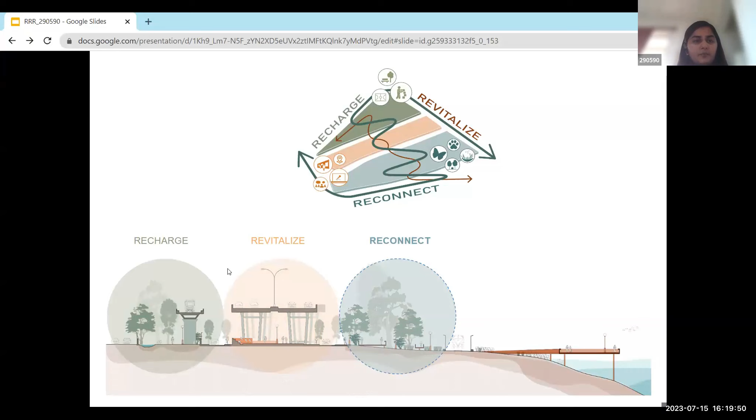Coming back to the spatial planning of the site, our design aims to connect and integrate the different parts of the site into a large urban park using an integrated network of trails, paths, and boardwalks that connect to different types of activity nodes within the park.

We use water as a running theme that is celebrated throughout the park, using water features such as retention ponds and grass swales filled with water running along the trails in the recharge zone. The acrylic art installation on the flooring symbolizes and reflects the water in the revitalized zone under the flyover, along with a shallow water body that continues the narrative of water under the flyover.

In the Reconnect zone, we have visualized the space as a wetland with a number of biofiltration ponds and bioswales that connect to each other, acting as a miniature of the traditional lake systems of Bangalore.

Moving forward, these sites serve as a stormwater management system for surrounding areas by incorporating blue-green infrastructure such as rain gardens running parallel to the roads, and bioswales which open into the retention pond, from where surface runoff is then carried to biofiltration ponds, to bioswales, and finally draining into the lake.

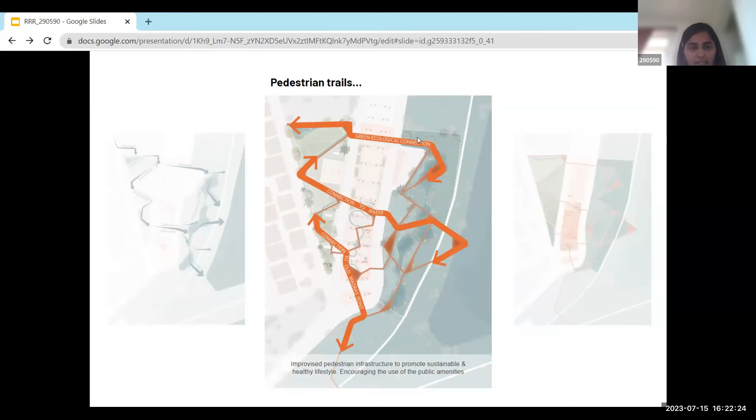To provide the connection to the old Madras Road, we have established a pedestrian walkway incorporating the existing Kasturi Nagar underpass and the existing walking trail along the southern part of the Benniganahalli Lake. In order to ensure safe accessibility throughout the site, improving the existing streetscape by providing better street infrastructure like street light, walkway, ramp, etc. is also an important aspect of our design and plan.

So we have divided the site into multiple activity zones based on the requirements that came forward as part of our community engagement and mapping exercises, keeping in mind the location and the footfall that the activities will generate. The Kasturi Nagar Park, towards the west of the site, is planned as a community-centric park where majority of programs cater to the residents of Kasturi Nagar, as the park is near to the neighborhood.

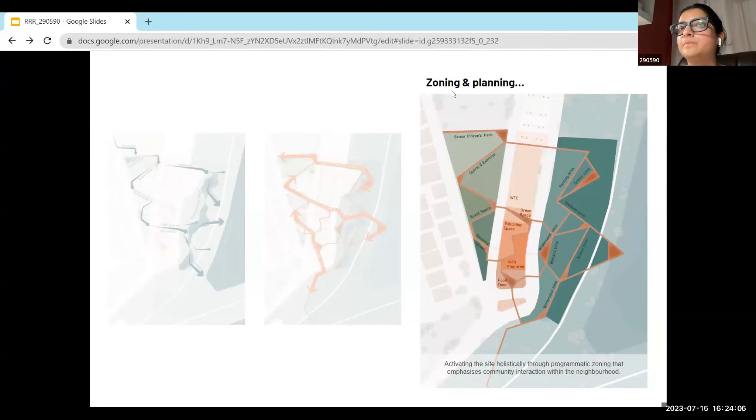You're not audible. Your voice is breaking. Hello, Aditi. Just a minute. Sure. The area of the flyover is planned as a dynamic space that transitions seamlessly from... Sorry, but your voice was not coming through. It's breaking. Yeah, just a minute, we are resolving the issue. Sorry. Hello, is my audio better now? Yes, it's better now. All right, I'll just continue. We lost whatever you were saying for 30 seconds. Sorry, we didn't hear. All right, I'll just... you can go through again.

So we have divided the site into multiple activity zones based on the requirements that came forward as part of the community engagement and mapping exercises, keeping in mind the location and footfall that the activities will generate. The Kasturi Nagar Park, towards the west of the site, is planned as a community-centric park where the majority of programs cater to the residents of Kasturi Nagar, as the park is near the neighborhood.

The area under the flyover is planned as a dynamic space that transitions seamlessly from day to night with changing activities. The part next to the lake is planned as a minimal intervention and ecologically sensitive park where people can engage with the local plants and different species of birds and animals that nest in and around the lake.

The recharge zone is primarily developed as a community-centric zone where large open spaces are provided to allow flexibility of use based on the community needs for different types of community gatherings and programs. Within this area, we have also incorporated jogging tracks, open-air gyms, and playgrounds for children to promote physical fitness and health in citizens of all ages.

Relaxation gardens provide space for leisure and can also be used by senior citizens to reconnect with nature while relaxing. Within this zone, we have also allocated a zone for community farming, which can contribute to strengthening community bonds and can also help in effective waste management by promoting organic composting techniques. This would also encourage the use of organic and homegrown produce that will enhance the health and quality of life of the citizens.

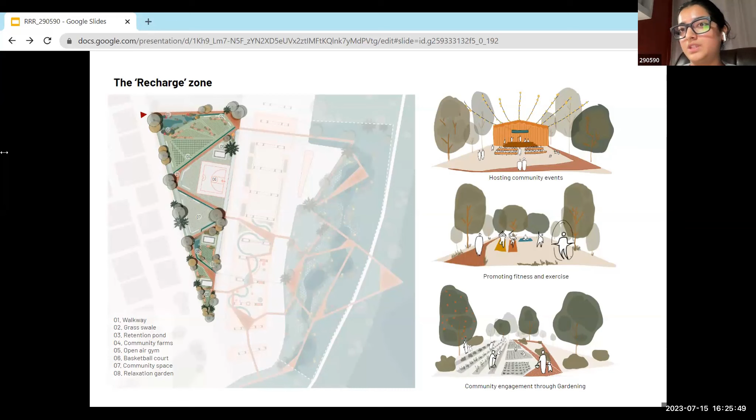We are envisioning the recharge zone as an oasis for the Kasturi Nagar residents, a place where community grows and interacts. One of the most important features of this space is the waste management aspect, promoting the circularity of food production, waste generation, and waste management in terms of infrastructure and construction materials. We want to keep the space as natural and low maintenance as possible by promoting the use of local materials and practicing reuse and recycling wherever possible.

This area also facilitates sports activities like skateboarding and wall climbing that are not commonly present in the Indian context.

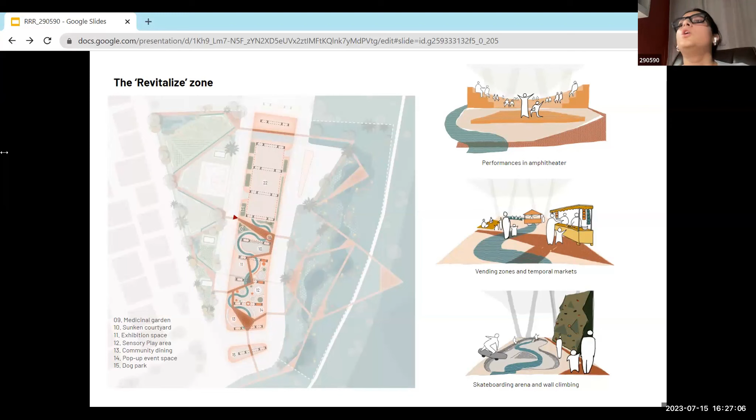One of the key features that came out of this community mapping exercise was poor to no light infrastructure under the flyover area and the streets, making the space feel unsafe and inaccessible at night.

The most prominent feature of the proposed space is the dynamic quality of the urban landscape that transitions seamlessly from day to night, where the light installations light up after dark, making the site safe, accessible, and active throughout the night. We imagine the area under the flyover to be well lit, not just with activities such as vending and temporal markets, but also a series of light-based art installations that could add to the character of the space and give it a unique identity.

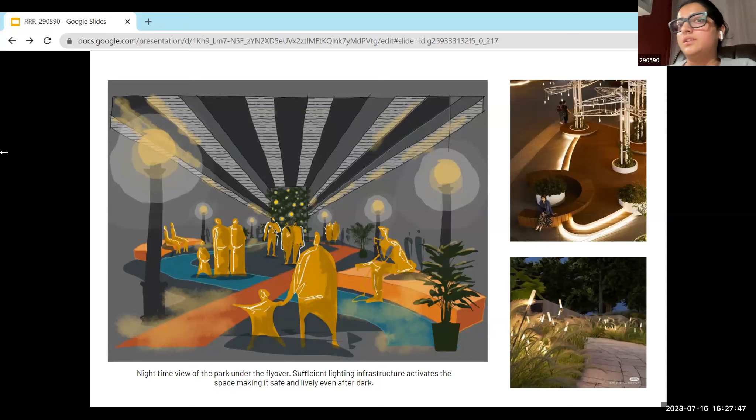The site is designed to enhance biodiversity by providing a habitat for local birds and animals, incorporating native plants, trees, and shrubs to create ecological corridors and support local wildlife.

The most important part of the design is the connection to the lake, where residents are able to access the lake as in older times.

Ecologically sensitive and natural design features on this part of the site help with stormwater management while also encouraging people to engage with the local flora and fauna.

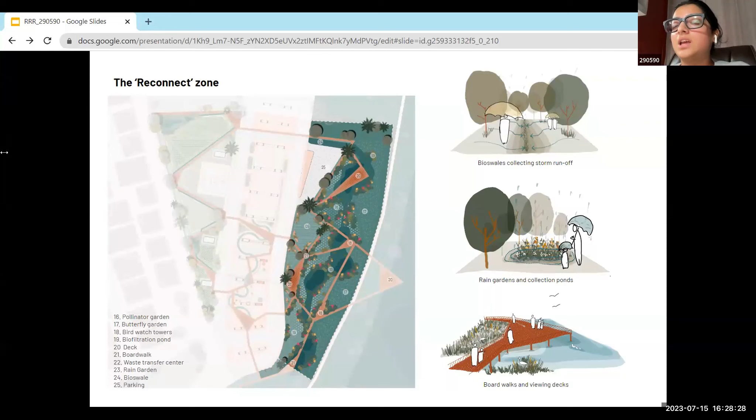The use of rain gardens, bioswales, and retention ponds as prominent design features of the site also double as educational opportunities for visitors. We imagine the Reconnect zone as a series of boardwalks meandering through the different landscapes within the site, providing visitors the opportunity to connect, engage, and educate themselves about the lake ecosystem and how important it is to the city of Bangalore.

Viewing decks and watchtowers can be incorporated in this part of the site, where people have the opportunity to pause, reflect, and interact with nature.

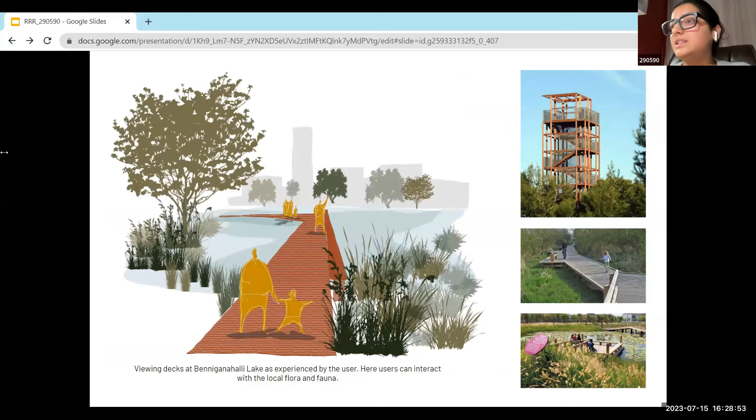To conclude, through this design intervention, we want to enhance the existing natural and built environment while addressing the ecological and social challenges that the site brings forward. Through our design and planning strategies, we hope to promote sustainability and increased community engagement that not only helps to liven up this area, but also helps in the long-term maintenance of the quality of the space.

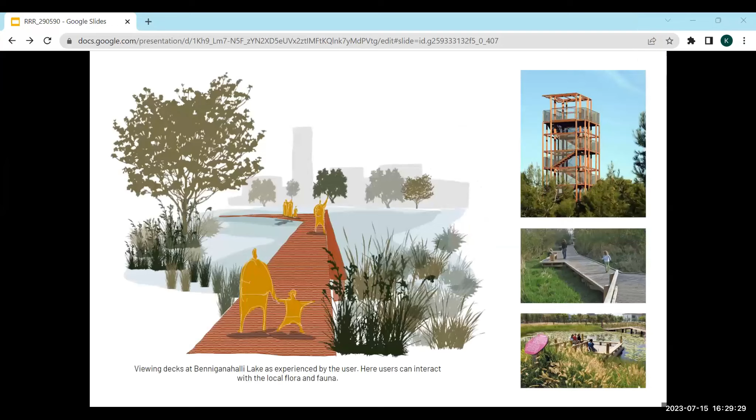Aniruddha asks: there is a windway tunneling effect because this site is on the east-west open conduit from the lake towards the road leading to Banaswadi. What will be the impact on the waterline trails?

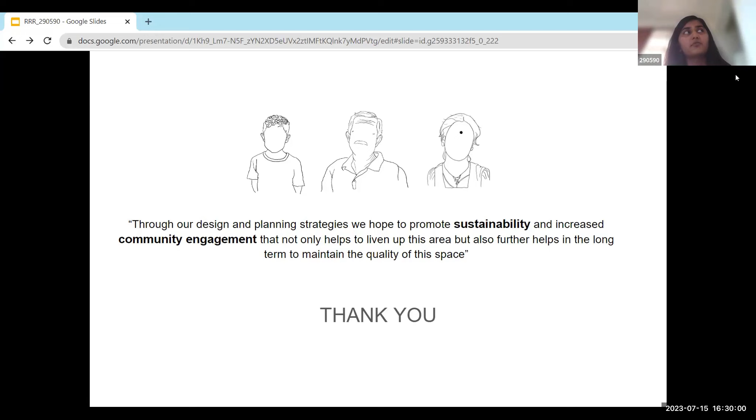You're talking about... sorry, Kelly, you continue. So, I'm trying to understand the question—how the wind is affecting the water. That's what they are trying to say.

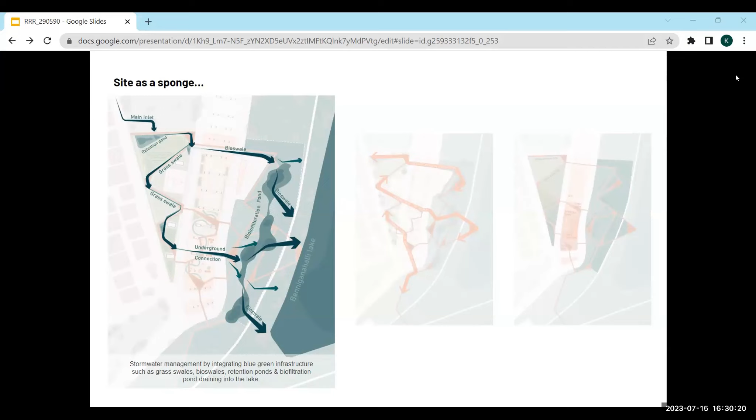Wait a minute, I wanted to know your thoughts. Have you thought about it—there is a major wind conduit happening here because it's east-west, and how it will overall impact your trail farming and all these activities? Have you considered the wind as a factor when designing this?

So actually, when we were thinking of water management, we were thinking just of the surface runoff, not particularly the wind, which will change the movement, because most of the bioswales and grass swales are thin strips, and the main inlet is from the Raj kaluves and the drainages running parallel to the road. So more or less, the wind is not going to affect the surface runoff—that was what we thought. But yes, we can also enhance and use this as an opportunity for further development.

Just to add to Kelly's point, I think it is a great question, and we had not actually taken it into consideration. Moving forward, I think it can be an important aspect to keep in mind while designing.

So do that when you will be doing another design, or even in this project.

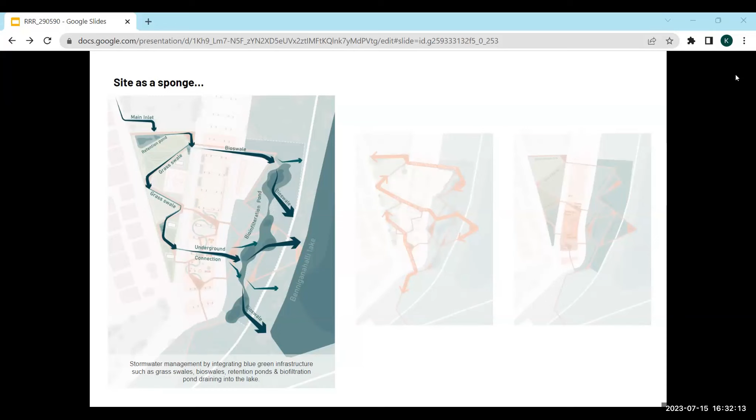Wind has a tremendous effect here also because of the setup of this place. On one side there is a residential zone, and wind, especially when there is open land used for farming, will create a lot of dust when there is no crop there or during dry periods. So when there is an open ground, there's a higher likelihood of dust flying across the overall area.

Also, since it's on the fringe of a lake, there's already a green cover with a lot of big trees. So wind also carries a lot of leaf litter and spreads it across the area. If there are water line trails, the leaves will settle into it, so there will be higher maintenance activity required for the water line.

Yeah, that's it. Yeah, yes.

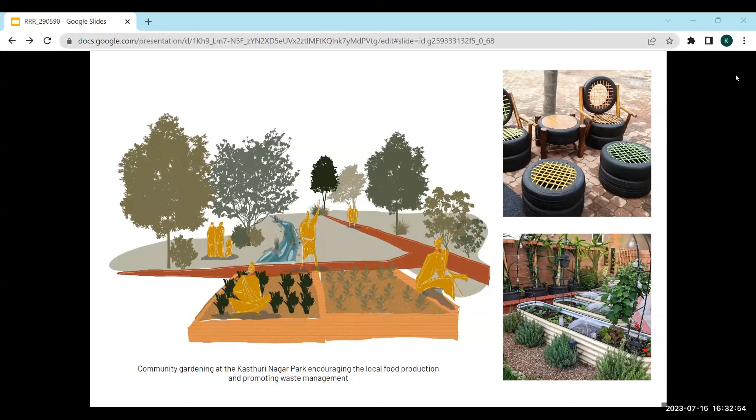Thank you. I request other jurors to share their questions and comments, please.

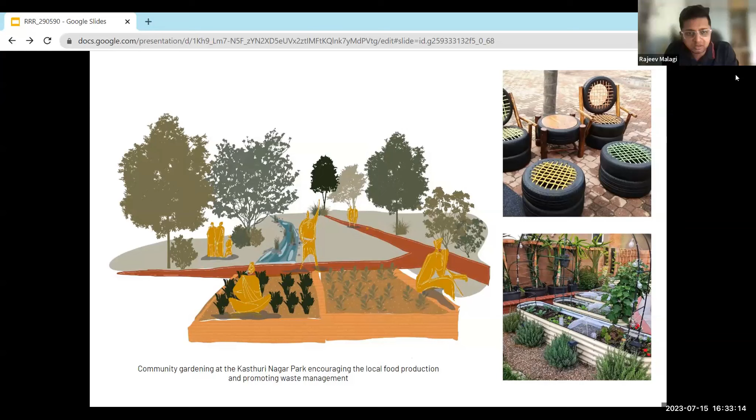Can I just mention it? It's rather easier to ask than type. Please do. Could you please go back to your initial diagram on the water movement, the first map?

Yes, sure. Is this indicating the slope of the ground and the way water moves, or what is this indicating? That's what I wanted to understand.

The blue arrow, yeah. So this is what we are trying to play with regarding the water. As the Raj kaluve is going straight, we are trying to bring in the water from the Raj kaluve. Can you see my cursor? No, but I do understand. Sorry, so we are taking it in three zones.

First, primary will be in the recharge zone. Then it is taken to a more natural zone where it is retained, because most of the time the surface runoff accumulates, and since the underpass is towards the south, the water gets clogged over there. So we're trying to delay the water by using this vacant land and putting in a biofiltration pond. That's the main idea, to avoid the clogging.

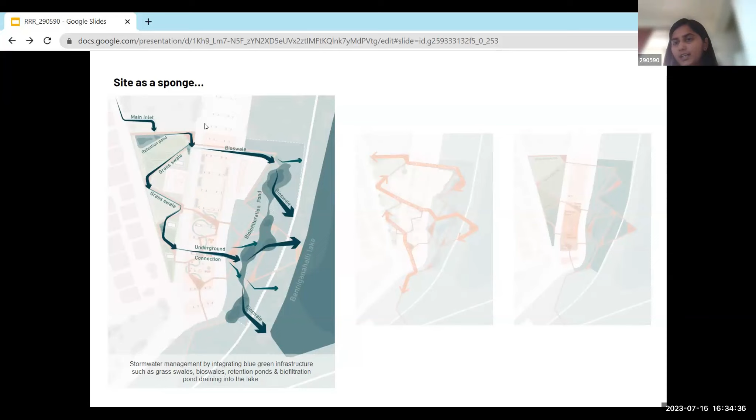Just hear me out. If you see the arrow mark towards the left, where you've written grass swale, on the left side - essentially if I'm assuming my slope to be from west to east, because you have the lake on the other side, my movement would be downwards, going from west to east. But if you see the arrow mark indicating the grass swale, it's actually going against the slope direction. Are you getting my point?

Just let me finish my question. First, I want to understand why you created this kind of pattern - I was presuming it's based on the movement of the sloping lines of the contours, but that also equally reflects on your pedestrian movement, which you're talking about, right? So the two questions I had: one, on what logic did you determine this whole water movement pattern? Because some arrows are going against the water direction.

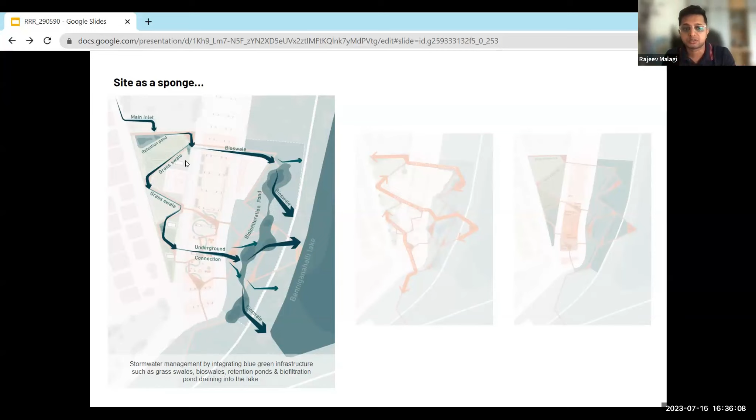Second, if you've determined that in the pedestrian layer next, nowhere in the whole presentation did you actually address the movement of vehicles which are also cutting across this. For me, this is shown as a project confined to one area, without any external influences like traffic movement and so on. So please address these two: pedestrian versus vehicle movement, and secondly these arrow marks of water movement.

To answer the first question regarding the movement of water: towards the right side, where we have our ecological park with the wetlands, we know that the water is actually sloping from west to east. Within our triangular part, the Kasturi Nagar part, we saw no visible level differences that could dictate where the water actually slopes towards.

So we were thinking that along our pedestrian trails, we could give provision for a slope down towards the pedestrian trails, where the water can be channeled. And then we have these pedestrian trails cutting across the site to the wetlands, which connects to the lake.

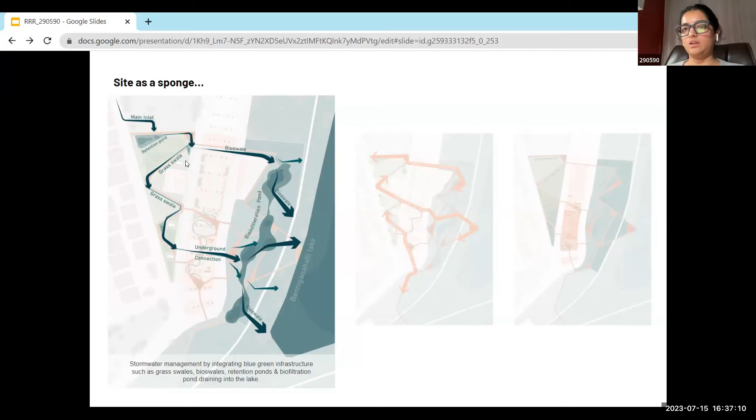So this will provide an artificial channel, not a natural slope, but something that we have created just to channel the water across the site into the lake. So that was the reason for keeping it along the pedestrian trail.

Second, about the vehicular movement that has not been addressed. So based on our understanding of the project, which might or might not be the case for what was required, we kept it to a relatively conceptual level.

Obviously, coming to the next stage was the traffic flow, the materials of the roads that will be used there in order to slow down the traffic, and how the pedestrian crossing will happen. So the question of material, infrastructure, and the kind of structures that will come into place, we thought was the next step into the process of design.

So here we've kept it relatively conceptual. I mean, even at a concept level, I think the traffic has to be resolved even before going to material. And that was the point I was trying to make, but thank you.

Yeah, and even the trail is right now cutting the railway line. So, I mean, you have to... Yes. So for that, when you have to channelize below the railway lines, it will hamper the traffic of the railway when you are doing that.

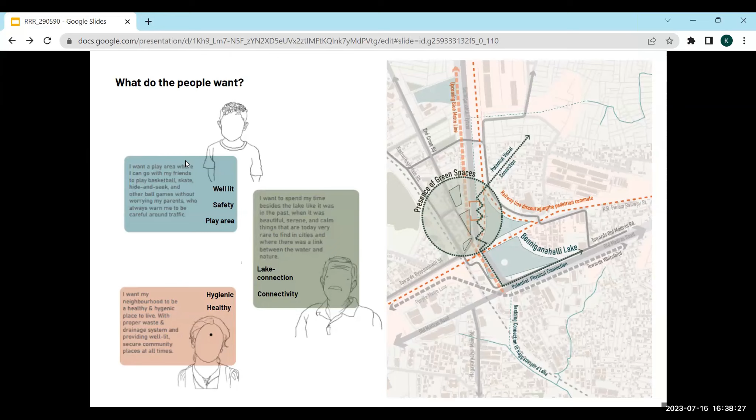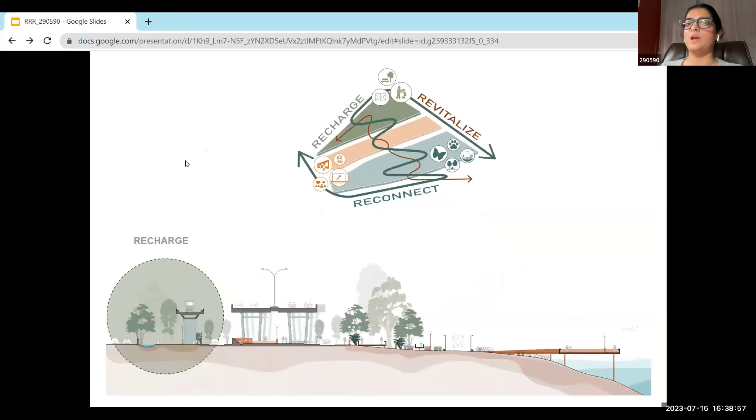Yes, so for that we were thinking that maybe we can introduce overbridges or underpasses, because there is a Kasturi Nagar underpass where the traffic goes under the railway station. We were considering using the existing infrastructure on site as a reference, as well as infrastructure that can be added on to make the connection more prominent and accessible, as one way to go about the design process.

Thank you. We have time for one last quick comment or question. Just to understand, did you say you wanted to, or have you done that? Underpass or overbridge? So we have thought of how the connection can be made.

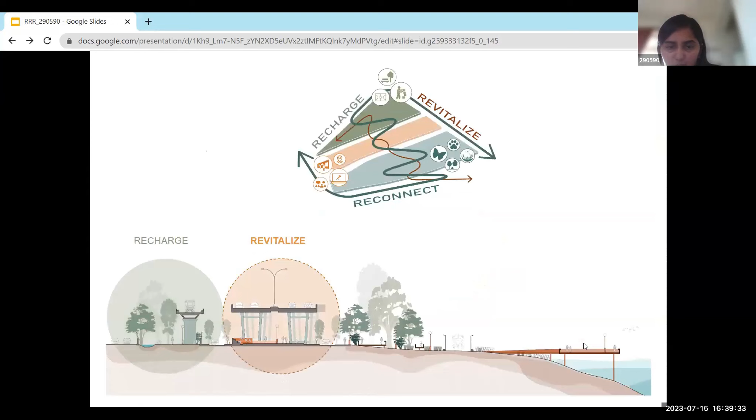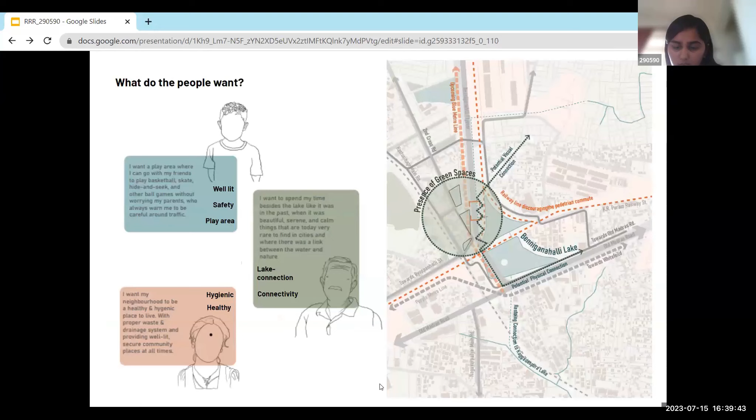As you can see from the master plan, this trail is continuing, this orange one you can see. And that is connecting to the underpass located somewhere here, so we are trying to give a direct pedestrian connection. We haven't really thought of the vehicular connection here, but we're promoting more pedestrian and cycle friendly movement, which is then connected to the already existing walkway on the southern side of this Benniganahalli Lake, and the dark maroon line, which is then connected to the metro.

So this is essentially about the larger connection that we want to establish between the site and the upcoming metro station, because that was a point that had come up in the visioning exercise also, that they wanted a better connection to the Old Madras Road. We saw that opportunity because there was already an underpass connecting to that part of the site. It was just a matter of introducing more pedestrian friendly infrastructure.

And there was already a walkway around the southern part of the Benniganahalli Lake. So we thought maybe we can just work with that and then connect to the new metro station and the Old Madras Road. Yeah, that's a good one.

Because there is already an existing railway bridge over there, which you can probably, with railway's permission, use to make a connection, which is very crucial, by the way. That you have thought about it itself is a good thing.

Yeah, that is what my question was. Have you thought about it, or have you demonstrated it? Because I think none of the four presentations, not just yours, showed a seamless connection, even at the level of design intent, to larger systems—from park to residential area to lake to metro station. It's all isolated. So have you thought about it or demonstrated it? It's just a thought.